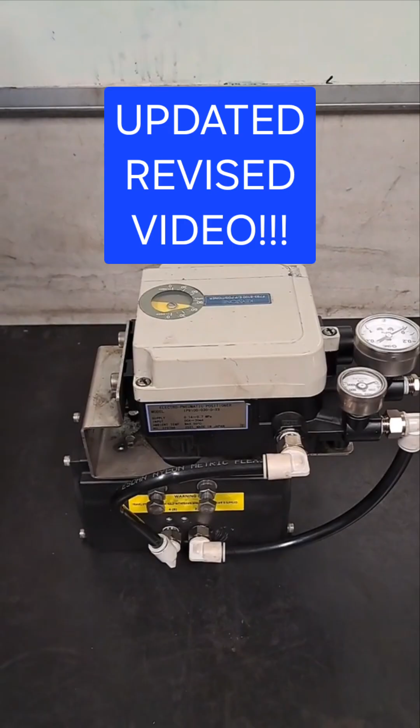Hey everyone, I'm just doing this video, just a quick little one to show the basic setup of a positioner. I'm hoping to make a few more videos to show you how to do a bit of fault finding on positioners, especially since there's a little thing inside there called a pilot valve, and we have trouble with that sometimes. That could save you a lot of money if you know how to change that out, why you change it out, rather than changing out the whole positioner body.

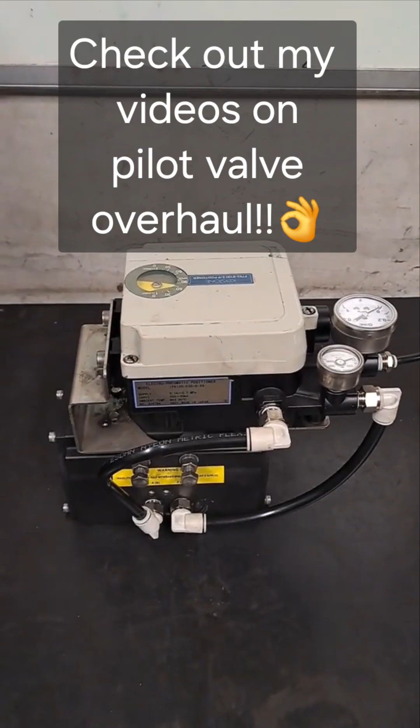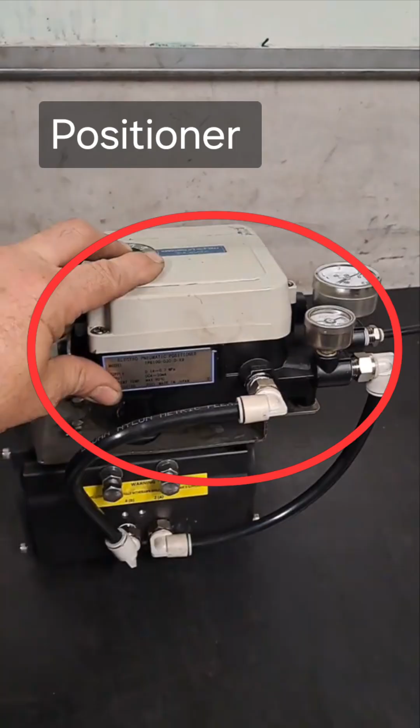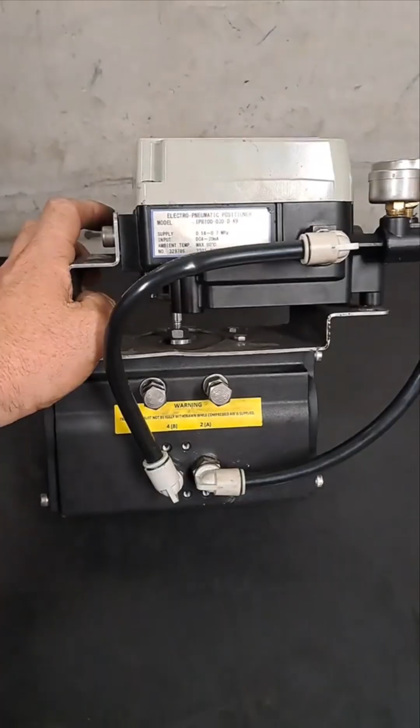So we're just going to go through some of the parts. So what I've got here is just a test setup that I've put together. I use this to test overhauled pilot valves or pilot relays. As you can see, it's got the positioner on top, the actuator, but it doesn't have a valve at the bottom. I've left that open because I don't need the valve on there for testing. All I need to do is get the actuator to move and get some feedback from there back into the positioner.

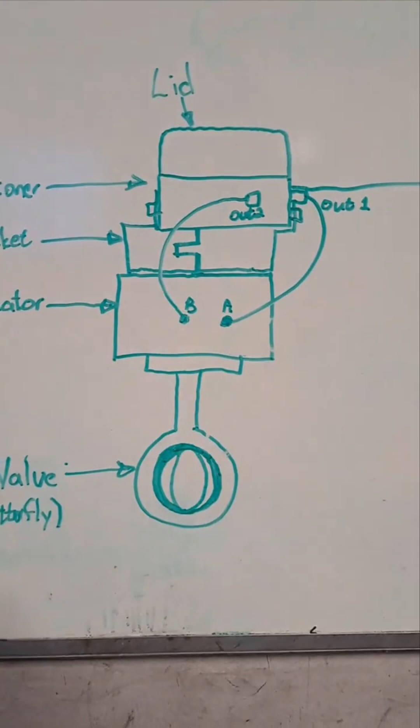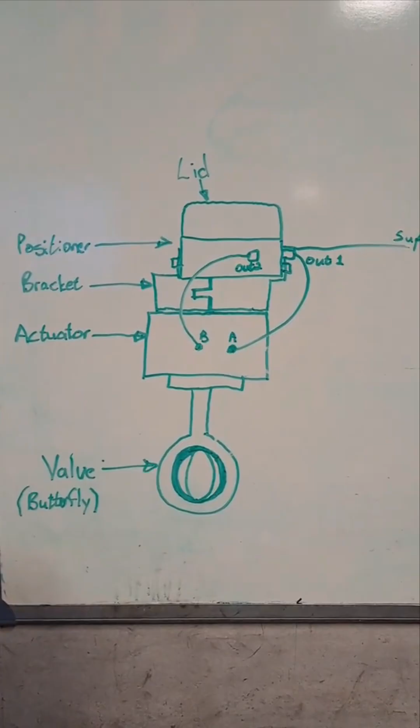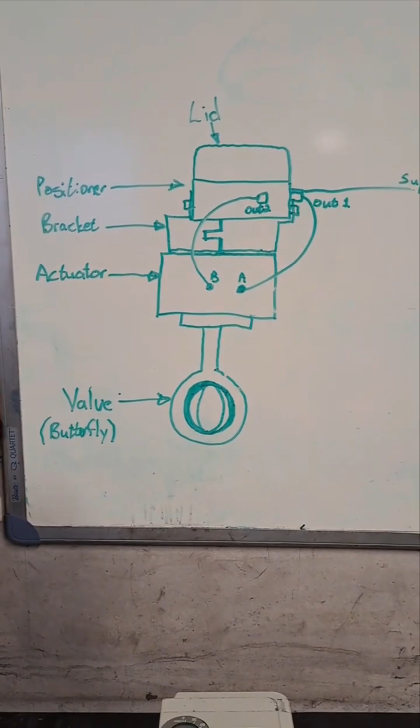Just for testing. So that's normally what a traditional setup in the field would look like, with a valve at the bottom. It could be a butterfly valve like this one, could be a ball valve. Once you start getting into gates that you need to open, you don't use one of these type of actuators. You will use a ram, as some people might call it, and then you have a very long feedback arm attached to that, and there's a bit of calculation involved to see how long that arm needs to be and where you need to mount that.

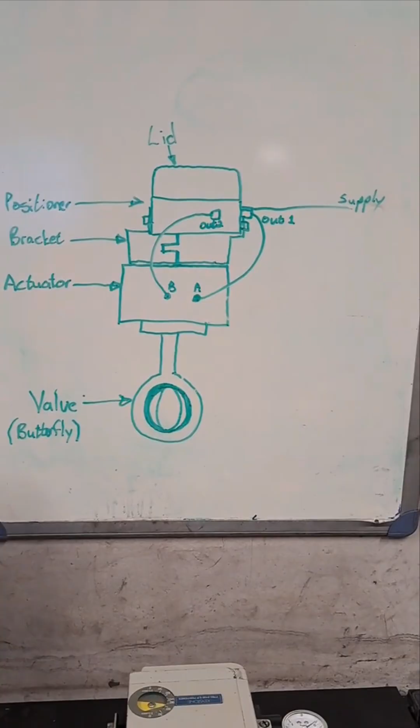I'm not sure if we're going to get to that in any later videos. We'll see. I'm not going to cover much of that right now. We're just going to go through this little setup here. So I'm also going to open the lid so we can have a look inside. Just have a quick talk about what's going on here.

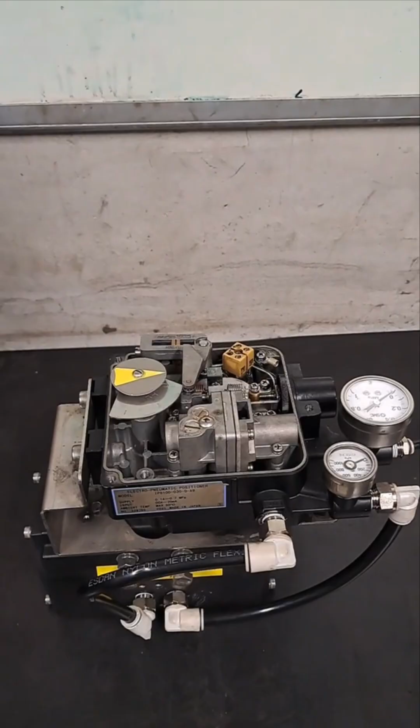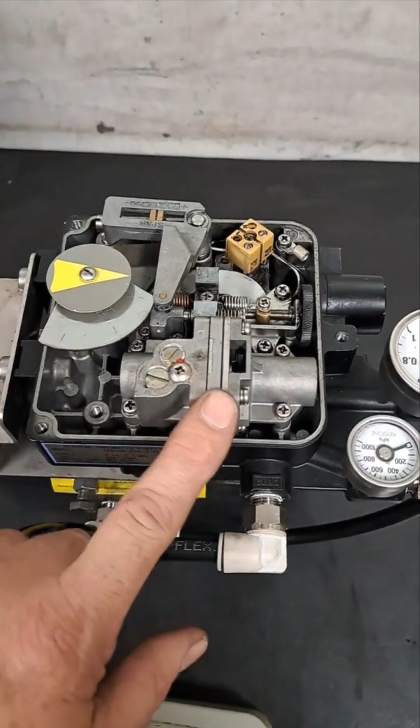Right, so I've taken this lid off, and you can see on the inside here, this is the pilot valve that I've been talking about. Can't say for sure, but I believe it's called a pilot valve because this is what actually steers this bit of machinery. So it decides to put air out, output 1 or 2. As we can see here, that goes to the actuator to tell it to turn clockwise or counterclockwise. So that's pretty much the little unit that decides where the air goes and how much of it goes there.

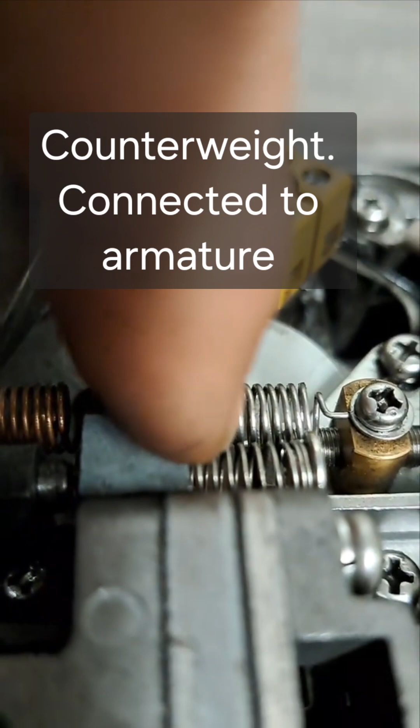So from that little pilot valve, there's obviously a few springs involved. This spring is loose. When you change this pilot valve out, you've got to be careful you don't lose this little spring. I'll show you how to manually actuate this positioner, in the field even. It's important for fault finding to know that you can do this, toggling this little arm here, which doesn't really move much. I'll see if I can get a bit closer. That's the extent of the movement. That gives you full movement in one direction and then full movement in the other direction with the springs. That's not much,

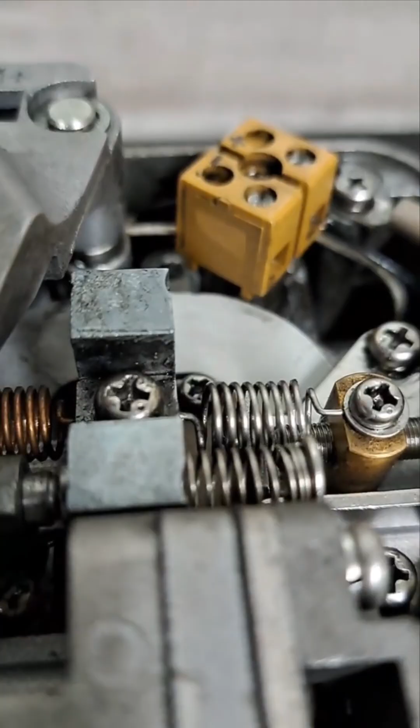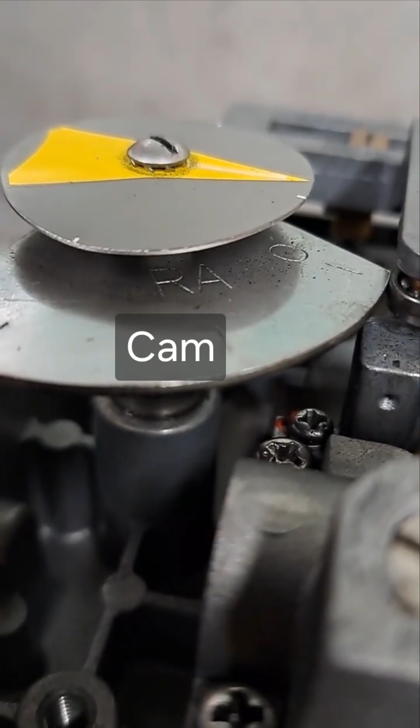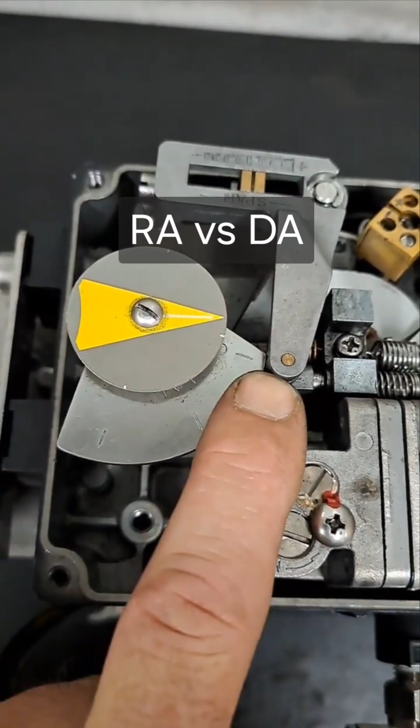but it does work. There's a little cam here, as you can see it reading RA on the top of the plate. That means reverse actuating. The other side of the plate, if you flip it over, is direct actuating. So what that pretty much means, as you can see, this cam is not a perfect circle. It's longer here and shorter there, but if you turn it around, the 0 will be here, 100% will be over there, and she works a little bit differently, which I'll probably also cover in future videos if there's a need for it.

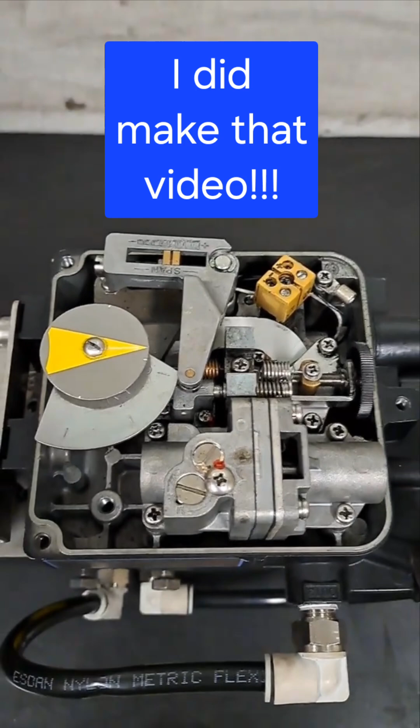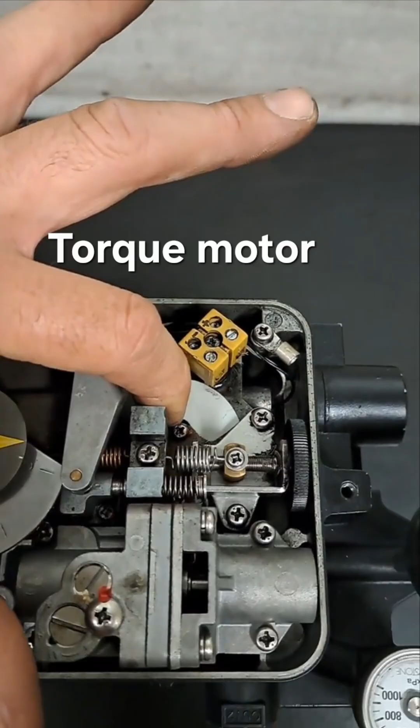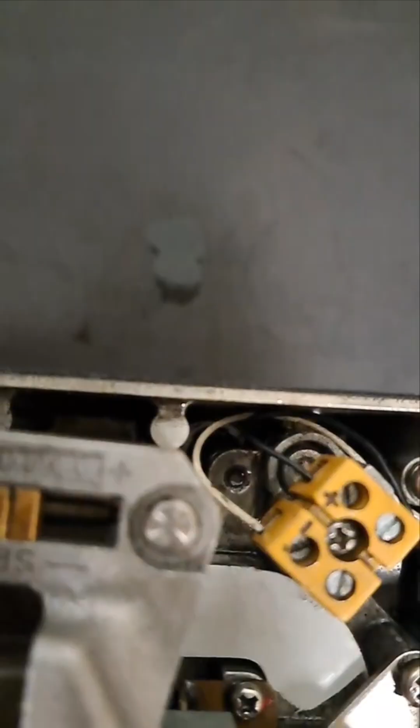So yeah, what else we have in here? Down the bottom here, there's a big strong magnet and a coil. From that coil come two wires. This one is set up onto this terminal block. Let's see if I can get a bit closer. Now it might look wrong because there's a black wire in the positive and a white wire in the negative. For some people, especially in Australia, that is the wrong way around. What that really is, is international standards, so just something to look out for.

If you get to a positioner after someone's had a go and they can't fix it, they might have seen that, thought it was the wrong way around and thought they fixed it, didn't fix the problem, and then left the wiring the way they thought it would be. So it's just something else to look out for.

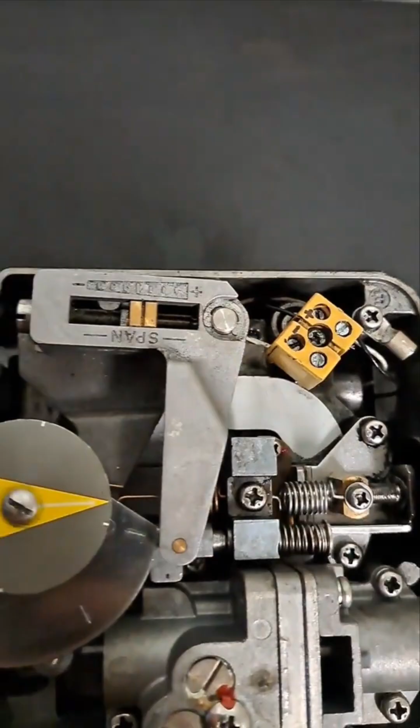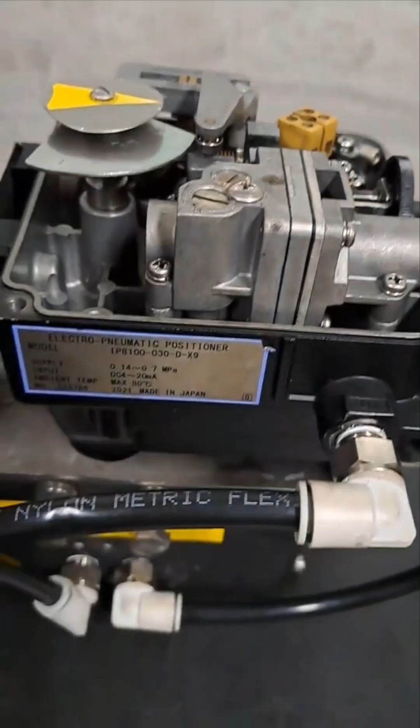Now there's two arms here, the one that says span on it, and there would be your span adjustment, because with these things we always need a span adjustment. And where it's sitting there is pretty much where it sits when you buy a new positioner, and they set up for actuators like this that pretty much give you a 90-degree range of motion. That's how they come standard. Obviously you might need to change it depending on what you are moving or actuating.

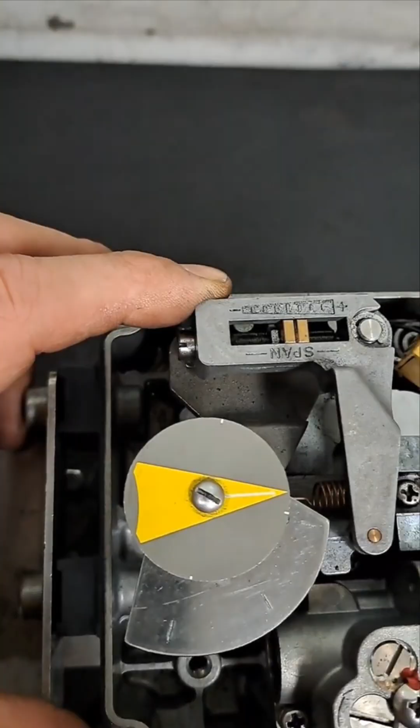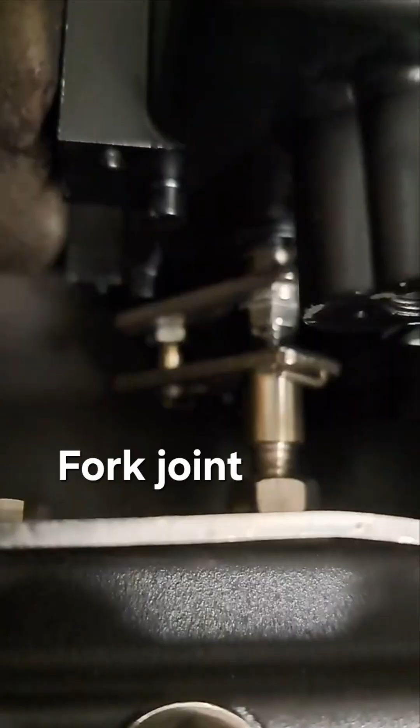Right, so there's another arm underneath there with a little wheel that runs at the back there, and as this feedback arm here moves, when the actuator moves, it's going to turn this cam that we see here that says reverse acting. Reverse acting is a standard setup.

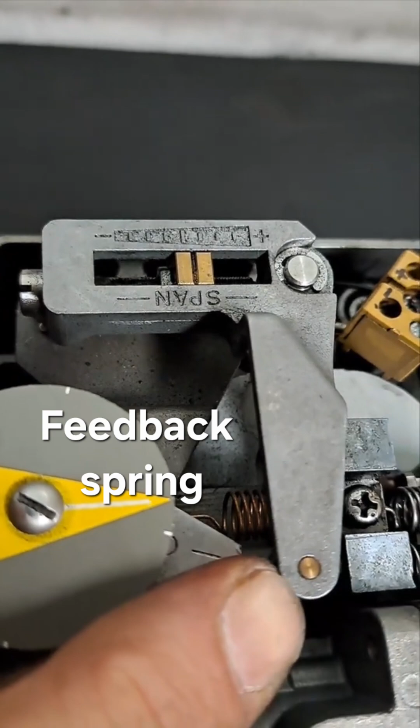So as that moves, it is going to lengthen this distance from the center to the end here, longer here, shorter there. So as this cam moves across counterclockwise to open, because she's shut at the moment, it's going to pull on this lever. I'm pushing it a lot, obviously, just so you can see it move. But yeah, so when that happens, it pulls on that bottom arm, which tensions up this spring, which is going to pull on this toggle over here, and a bit of a counter spring there.

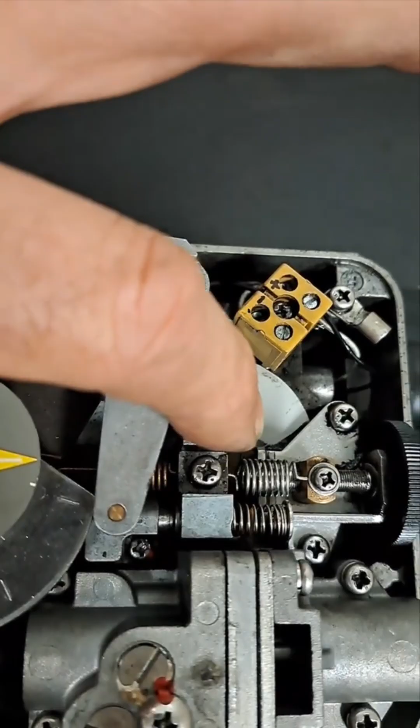And what happens pretty basically is your 4 to 20 milliamp signal goes to this coil, which would move this arm into a specific point. That translates through to this pilot valve. It decides where to put air. It's going to move the actuator. That feedback arm is going to pull this cam across.

It's going to pull this counter lever back, and it's going to pull that coppery looking spring there back up to a point where this finds an equilibrium, so that the pilot valve stops sending more air one way rather than the other. So as it gets closer to its position, this arm would move closer and closer into the right position.

The mechanical feedback balances against the 4 to 20 signal through this little toggle arm, and when that reaches an equilibrium, that's when the pilot valve stops sending air to the actuator, and it sits where you want it to sit, whether it be 25%, 50%, 75, 100, or any other number you can think of. So that's pretty much just the basic operation of that.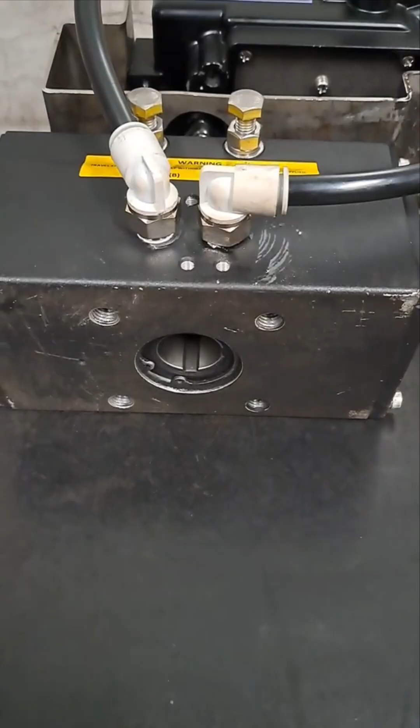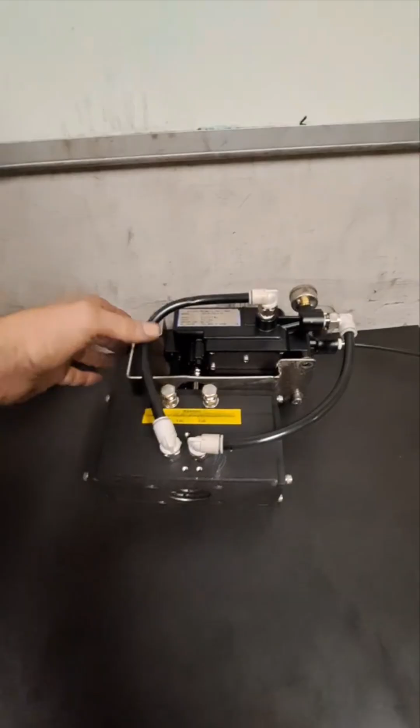Obviously, I don't have a valve on here, I don't have it hooked up, but as you can imagine, with the valve in there, that hollow shaft is going to turn the shaft on the valve and make the butterfly valve open, or whatever other valve you have. So yeah, that's pretty much the basic setup and parts of this.

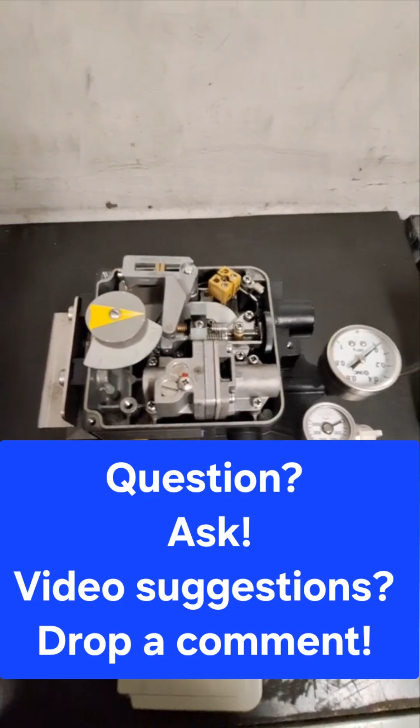Now, I'm not an absolute expert on these things. All I'm trying to do is share the information that I have, that I've built up over a few years by playing with these things myself, doing a bit of research and listening to other people. I've got some bad advice from some people. Some people didn't understand how things work. They just followed a process without understanding it, and it only gets you that far.

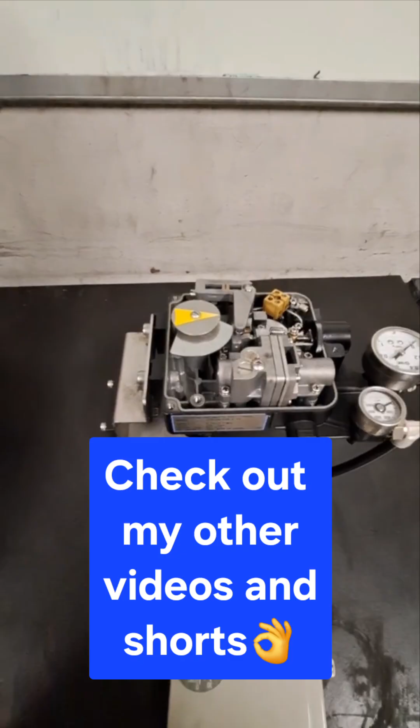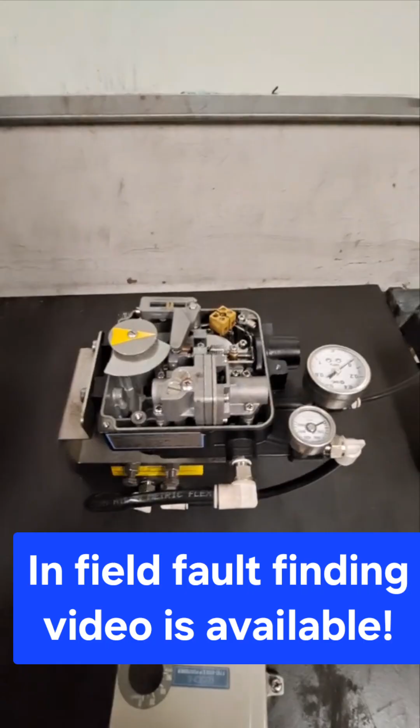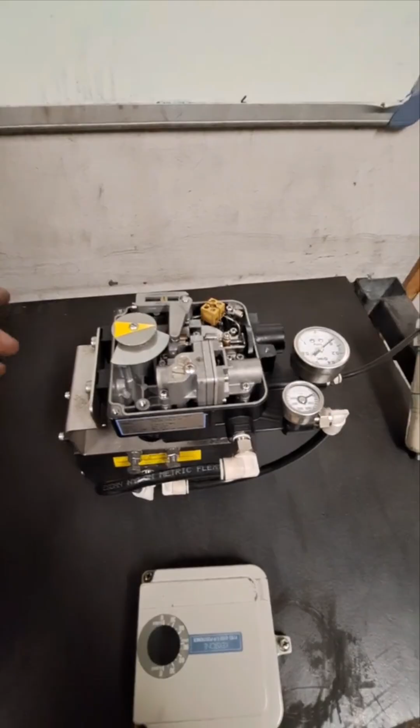But what I'm thinking of doing in future is basic fault finding. When you walk up to one of these in the field and they say it's not working, the whole process of understanding what the operator is trying to tell you, having a look to see yourself what's going on, and just basic steps that you can go through, hopefully in a way that makes sense, a way that will save you time, in a way that will immediately eliminate some areas of fault finding so that you can focus on the path that's going to help you to solve the problem.

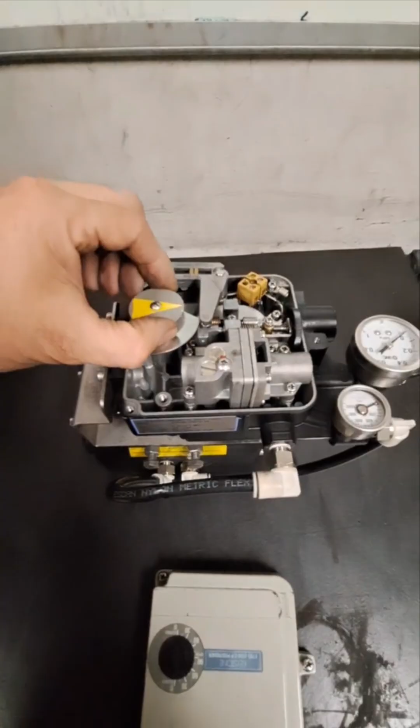And you can go through absolutely everything, but I think if you find a way to find the right things to look at, you can eliminate certain areas or help you go into the right direction.